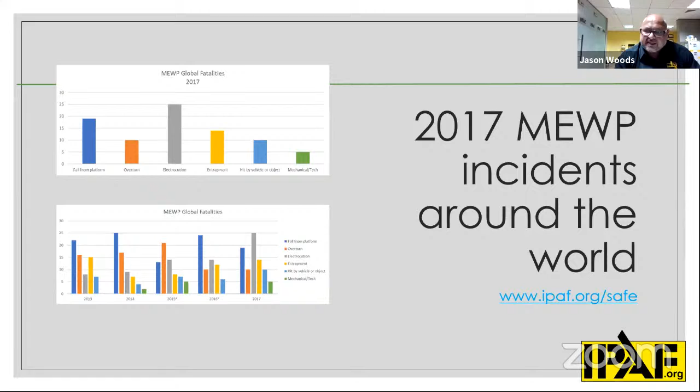So think of your projects where you're using this type of equipment, and mechanical or technical failure. In the Middle East, we generally see machines catch fire at the engine. That means the platform is elevated. Now these lifters reach, the boom types are over 180 feet now. You can get a scissor to take you over 100 feet. So if you've got an incident of mechanical failure at the ground and you're elevated, then you need to have a plan. And your plan needs to certainly bring the people down safely, meaning the workforce or the operators. So we've been following accident trends since 2010, and we continue to observe accident trends.

Because don't forget, I could highlight something quite quickly here - we call it emergency descent. So it means that if a platform is stuck in the elevated position, there are two systems which we're able to bring the platform down safely if the normal controls are not working. One is from the hydraulic system, which is great. But secondly is from the auxiliary system, which is the normal control panels - could be in the platform whilst you're elevated, or it could be at the ground position. But naturally, you're relying on the battery to give you that power source now.

So if you don't have an inspection process and you rely on an auxiliary system for an emergency lowering on the project, then, if it's not in good working order, you're just waiting for a real accident to really happen.

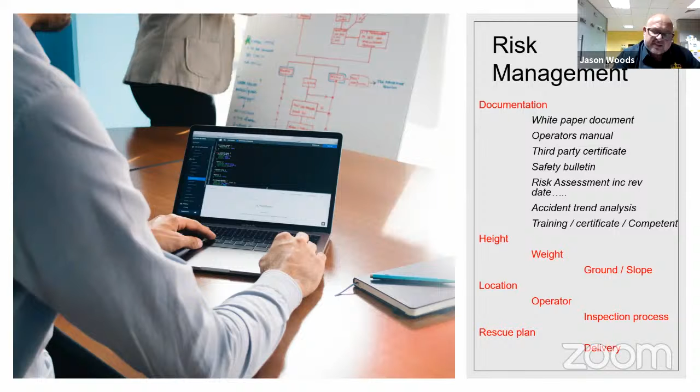Many sites have a delivery and collection zone. So when the machines come into the project, they're inspected as they've just been offloaded from the rental company. Like I say, the terminology for risk assessment, risk management, I think that it never goes away, and it continues to be a revision. Maybe you don't change things, maybe you don't have to change things. But I think as safety professionals, it's very important that we analyze and assess - is there a potential risk of something going wrong?

So when we focus on aerial work platforms, they have many different industry names. People call them man lifts, man lifters, boom lifts, cherry pickers, flying carpets. I've even seen workstations. But in the nuts and bolts of it, the machine is manufactured by the manufacturer to a standard. How we divide the machine is, it depends how the machine lifts away from the chassis. So if the platform stays inside the tipping lines of the chassis, then that means that it's a vertical lift. This one, for example, on the picture, which you can see, it's a boom lift. So naturally it's designed for the platform to come away from the chassis. So that then takes it into a B category, which falls as a boom type machine.

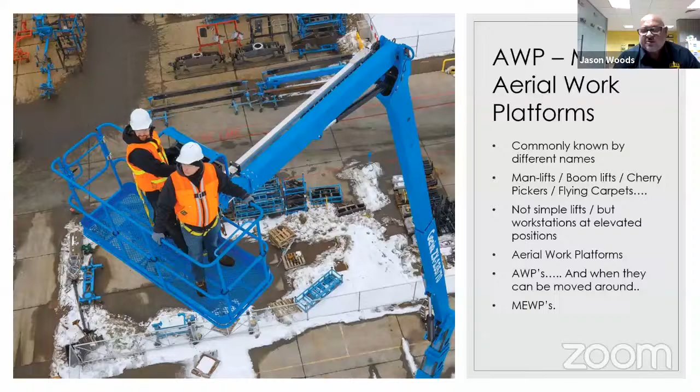But as you can see, in terms of our images, we have different types and different designs of lifters, but they are categorized like your driving license. If you're going to drive a motorcycle, you certainly wouldn't need to have a heavy goods license, because the motorcycle is a totally different drive.

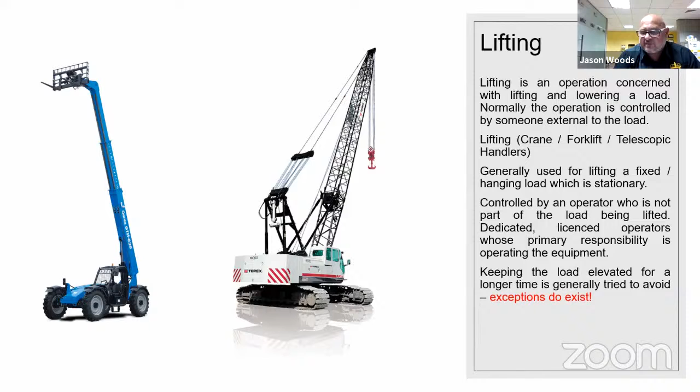There's always a big question in amongst the divide between lifting equipment. I think that where the divide always comes in is, if you imagine cranes are dedicated to lift materials, granted, but it's controlled by an operator who is not part of the load. That means that the guy or the operator could be in his platform, in his cab, for example. Whereas when we look at the elevating work platforms, it's slightly different, because the human body is actually inside the platform as he's maneuvering from A to B. And it depends what type of machine and category we have, and that then relates back to the license.

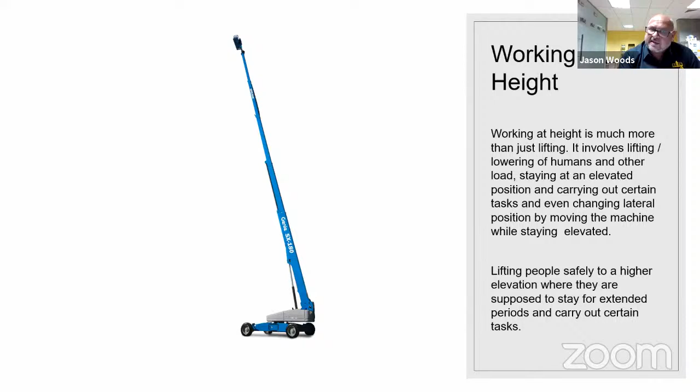But working at heights is certainly a serious issue, and I think it's very important that we do focus as safety professionals. They're never always small heights - sometimes they're great tall heights, let's call them. And it's never a straightforward lift, as you can see on the images. Sometimes we have confined space at height, which then takes a skilled operator and a manager to actually maneuver the platform into a safe zone.

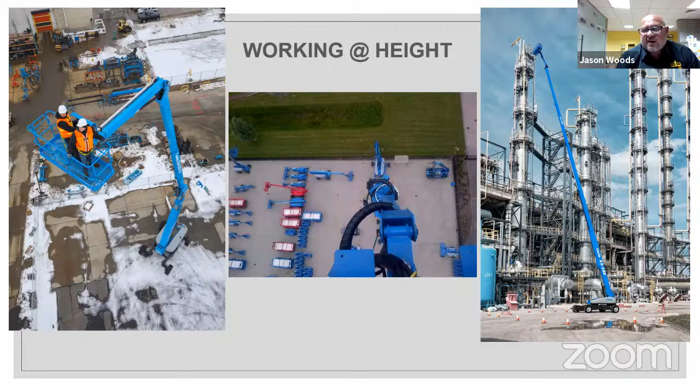I'll just briefly touch on this. There's a lot of information you can filter back and forth to the IPAF website. We have a category poster, so we have two things: one is category and one is type.

We would expect to see some limit switches involved at these heights, and it would be important that the limit switch is your safety device, so you're not going to drive a machine too tall. So a 3 category means the machine is mobile, and the B category means the lifting element comes away from the chassis.

I'm not going to delve too deep into that, but I'm sure most of you on this call will certainly use a 3A and a 3B machine. They're probably the most popular machines you'll see on the worksite. However, you will see some 1Bs floating around also, but the majority would be 3B, 3A, 1B.

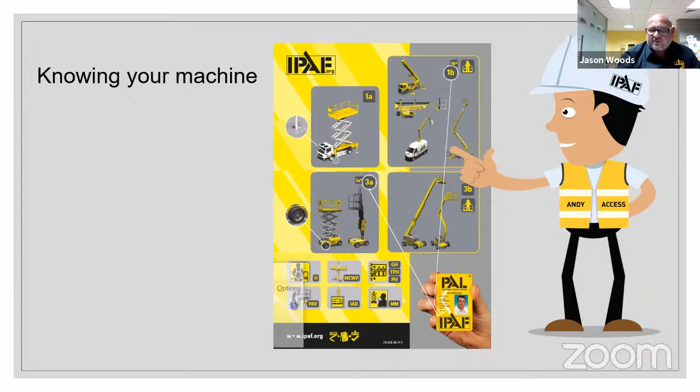Let's focus on specifications, because as a safety professional, when we're analysing what type of machines we should have on our project - I know rental companies can come and help you, but you should have knowledge also as a safety professional. So I'll give you an example here. We're using a Genie brand. GS stands for Genie Scissor.

The 1930 means we're 19 feet high and 30 inches wide of the platform, or the chassis. If we go to the GS5390, it would take us 53 feet high, with the chassis width sitting in at 90 inches.

The terminology RT is rough terrain, meaning you're driving over uneven ground, for example, whereas the GS19 would be a slab scissor, indicating towards solid ground. Some slab scissors will be an indoor machine only.

You'd expect to see some decals on the machine, or certainly the operator's or manufacturing data plate would give you that information. DC would be direct current, so that could be plugged in. Or you might find a hybrid, which would be bi-energy, generator to charge the batteries.

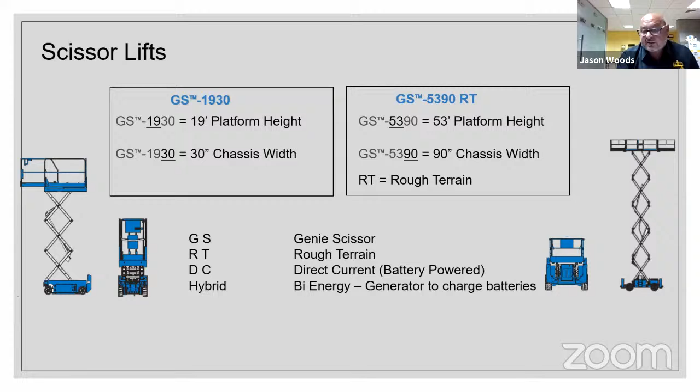When you look at the platforms, you can see on the right side we've got a double extension platform, whereas on the left we have a single extension platform. Sometimes they're manual, sometimes automatic, meaning they're operated through the controls - you'd have an additional toggle.

When we focus on booms, the telescopic boom means it's a straight boom - you'll see XC now appear on some of the machines, and what that means is it gives you extra capacity in terms of safe working load. But there's a catch to this: if you're going to put more in the platform, then naturally your heights are going to be reduced.

There will always be guidelines through your specification sheet in terms of if you're able to put extra capacity of weight into the platform, but certainly look at the working envelope - with extra capacity there would be reduced movement of the platform whilst elevated. Again, I can't emphasize this enough - when doing your site surveys, certainly get the rental companies involved. They are experts and have a lot of tools to help you with your risk assessment.

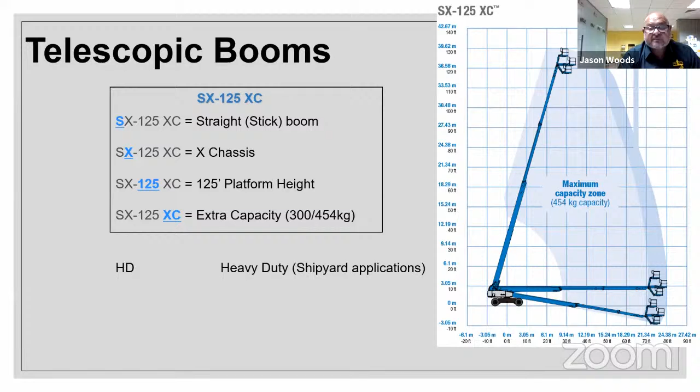We have two types of booms which we work with.

The first boom was a straight boom, whereas the articulating boom is dedicated and designed for up and over buildings or obstructions. It gives us extra features, which means extra controls inside the panel and at the ground.

The ground is important for pre-use inspections. So for example, we have a Z6037 FE on the screen. Z would indicate that it's an articulated boom, so that would be the lifting element. The 60 would indicate the platform height, the 37 is outreach, and then we've got FE for fuel electric.

But other abbreviations then: if you see N on the actual machine dimensions, that would indicate that the chassis is narrow. So perhaps you're working in a confined space but still need to reach 60 feet with 37 feet outreach. Then we would be talking to the rental provider, expecting the chassis to be narrow. The jib is a fantastic piece of equipment.

It's kind of another meter, or just over a meter, of lifting element. So if you're moving into a confined space, having a jib on your platform or lifting element can help position that platform nice and comfortable to carry out some work activity. You have J for jib, and RJ is different - RJ is rotating jib, meaning the jib would actually move. So you have a turntable on the platform, but also a rotating component on the jib.

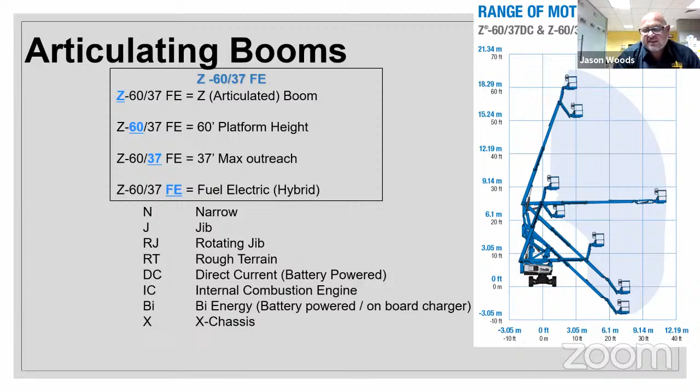So again, we're back to DC, RT, IC. We have BI, which is BI energy, focused on battery powered. And then we have X for the chassis style.

Now I'm going to take us back to the headaches which we have as safety professionals: soft ground, uneven ground, and slopes. Construction projects are never straightforward because we have areas of concern - machines get caught, they get stuck, and generally it's because the machine has become the wrong piece of equipment for that particular setup.

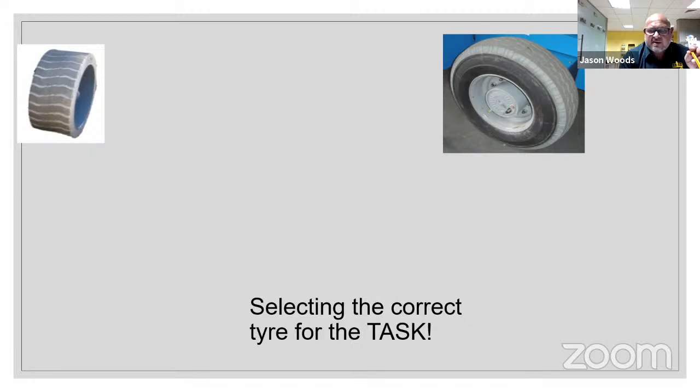So certainly focus on the ground conditions. I have some fantastic tools here which can help you, and what I like about it is it's free of cost - no charge, everything is accessible on the IPAF website. So the first step is to make sure we have the right wheels, or tires rather, for the project and for the use of the equipment.

This is very important. We have solid tires, foam-filled tires, and pneumatic tires - they all do different jobs. A pneumatic tire has a disadvantage of punctures, but a great advantage of giving better grip. If you think of a finished flooring, for example, a pneumatic tire is going to grip that floor far better than a solid or foam-filled tire.

But the disadvantage is we're encouraging punctures, and rental companies will give you a headache because they don't like coming out for punctures. So we must really focus on the type of tires we're going to use with our elevating work platforms - some are marking, some are non-marking.

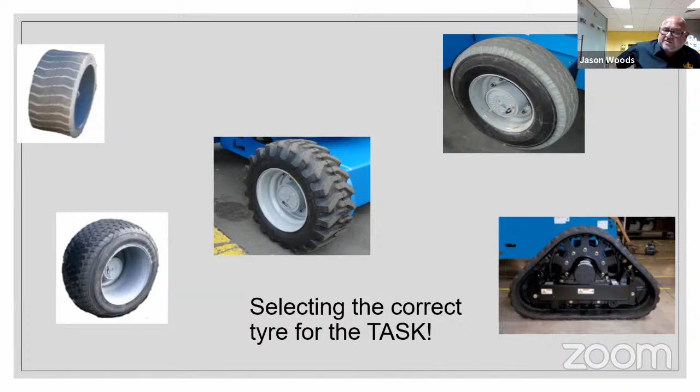The run of the mill, if it's indoors, we see a grey tyre on it, meaning it's a solid tyre and certainly non-marking. But there are other tyres available - we have turf tyres, rough terrain tyres. We then filter it through as pneumatic, foam-filled, and solid. The disadvantage of a solid tyre is it's going to be heavier, so now we've got to think about the actual weight and where the position on the platform is going to be.

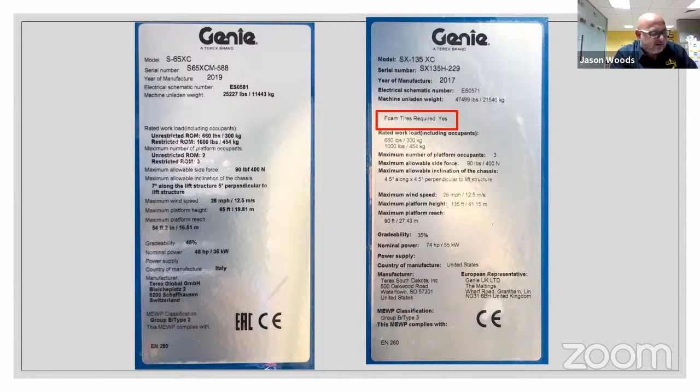The difference you can see now is the tires. With Genie brands, I think anything from 125 foot upward, you will not see a pneumatic tire fitted to these machines. Naturally it's the sheer weight of these elevating work platforms - imagine having a pneumatic tire on a very tall boom type machine, the risks and hazards if you had a puncture or lost pressure in one tire, and how much that would impact the person in the platform. So please focus on your data plates, because as you can see they can be different. Make sure this is part of your initial setup and risk assessment.

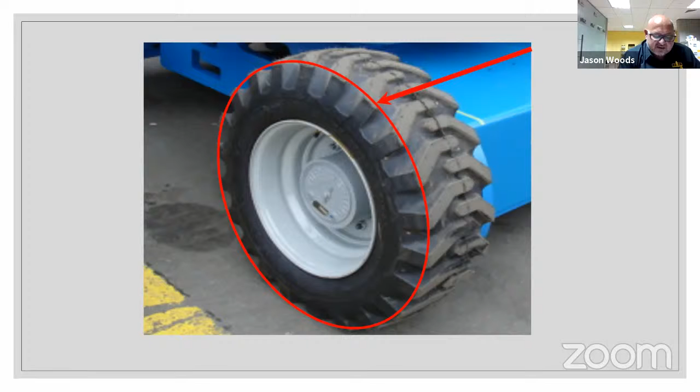Just a couple of key areas on tyres. A lot of questions come in about wear and tear of tyres. If it's a solid tyre, what's the dividing line - can we still use it, or not? There are a few ways to look at this. Certainly we have to think if it's affecting the drive and stability of the machine, then it needs to be questioned.

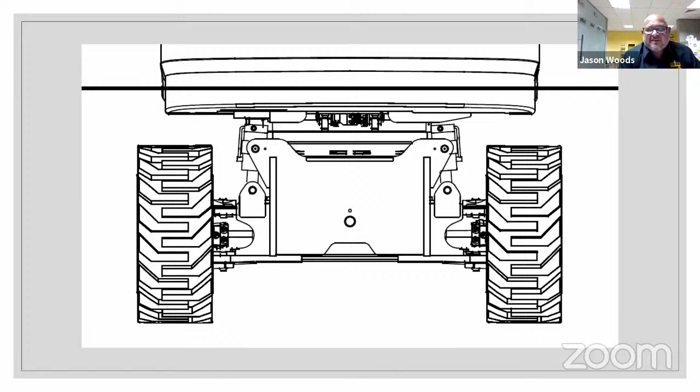Don't forget, when we look at the chassis and the measurements - the calculations from floor to platform height - it's like in scaffolding, where the narrowest base dimension affects the height of the structure. It's the same concept with elevating work platforms. We measure the width of the chassis from the wheels. The tire design also plays a role as ballast weight for that particular type of unit.

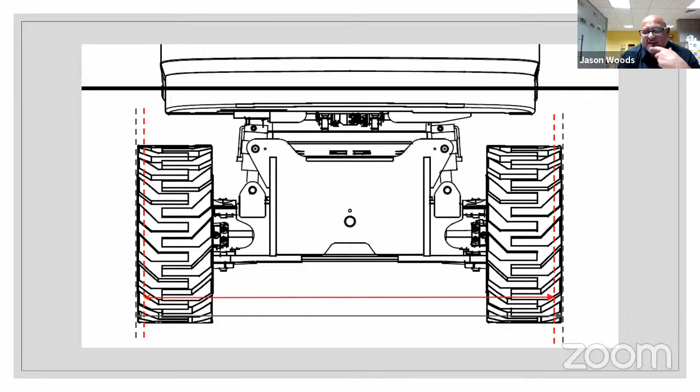But imagine if I was to shave 8 inches, 4 inches off a solid tire on your platform - you must ask yourself how much that affects your stability. A lot of this must be cleared through the rental perspective, but as safety professionals we should be alert and aware, because if we have a narrow base and we're still raising to substantial heights with platform movement, we now have a potential risk of tip over. When a machine tips over, everybody tends to blame overload, but sometimes it's not overload - sometimes there are a few areas of concern we need to address.

When we start looking at driving on slopes and uneven ground, I think what we've got to do is focus on the data plate, follow it through to the manufacturer's instruction manual, and indicate what position we're driving in. Are we driving into the slope? Is it a negative or a positive side? That would have an impact, because your gradients are changing and your platform positioning is changing.

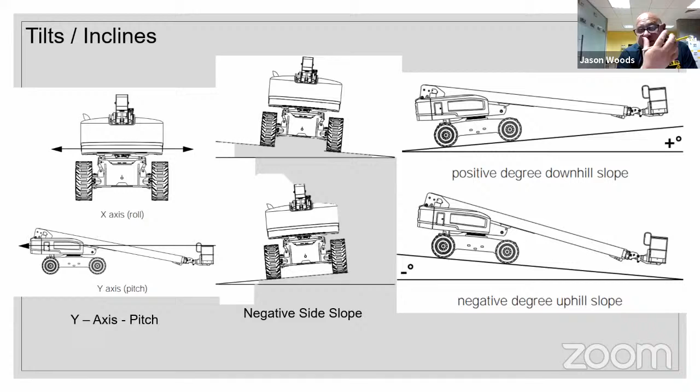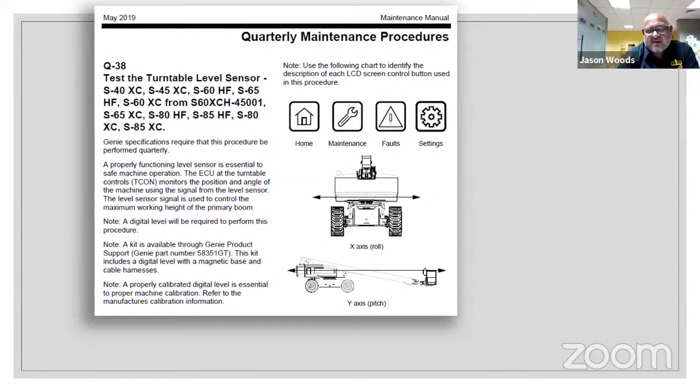If I push into maintenance, we'd be asking questions about the inspection procedure. For example, on a Q38, we must test the turntable level sensor - this is meant to be done at a set procedure. As you can see on the slide, Genie have indicated every quarter that this should be checked and tested.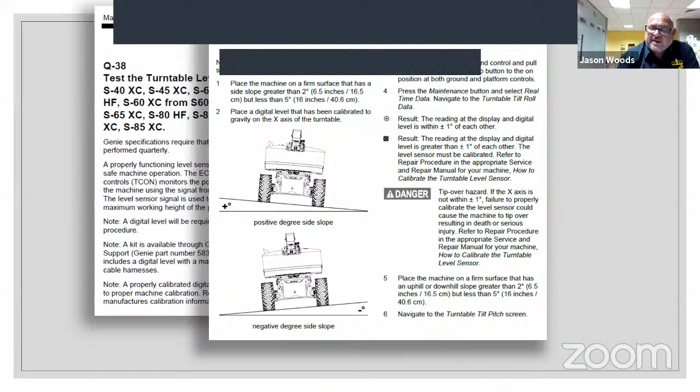Again, we focus back onto the slopes. There's a procedure - we have a tilt sensor fitted to the machine. The tilt sensor will be of two types: one will be a manual type.

So it's like a spring-loaded cone with a spirit level bubble on the top. The idea is that the moment that bubble moves, as you're driving over uneven ground, it's sending a message to the machine through the system. And the idea is that if we approach something too steep, we need to do something about it.

But you see, even on a pre-use inspection as an operator, even if you're just pushing the spring-loaded cone forward to check whether that alert is going to happen, you're not actually taking a reading of the tilt sensor. You're only checking that it's active and functionable. So then we have to take this back to the rental provider to make sure that they're actually carrying out their full inspections.

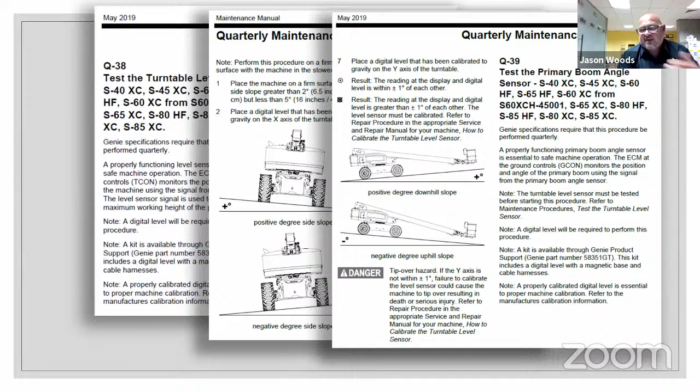The other type of tilt sensor is covered, so you cannot touch it, you cannot play around with it. The idea is when it becomes a digital tilt sensor, it means you physically have to drive this machine into the set slopes, and then it would trigger off to indicate that it's going to send that message back to the operator.

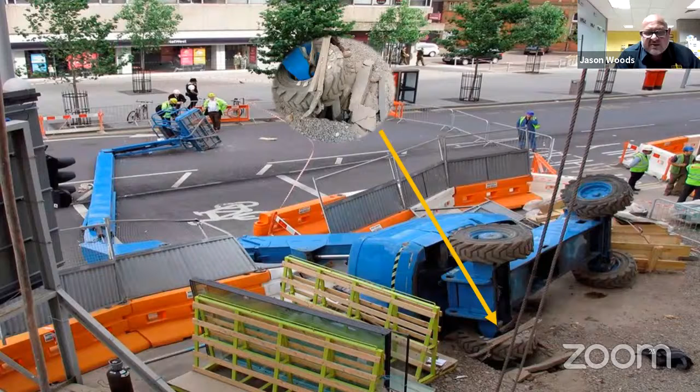So then we start our investigation - who's at fault, what could we have done to prevent this, and so on. I think we have a clear message when we teach operators, and the message is always: walk the route, think of housekeeping. I'm sure that's one of your biggest headaches, but certainly think of housekeeping. The operator of this machine should have done that, because when we look at the next slide, I know it's a construction project, but there was a manhole there and we should have avoided it. The weight of that machine is far too heavy for that manhole. So which then indicates that the machine just drove straight over it, and naturally it took a turn for the worst. Like I say, planning is so important.

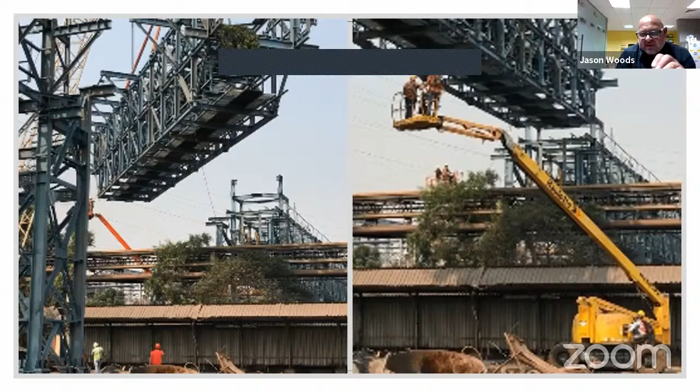On the IPAF operator training module, we do emphasize that the operator has responsibilities also. That's why they come for training. Again, when you look closely at this image on the right-hand side, you can see that the operator is at the ground, sat on the wheel, and there's two workmen in the platform. A big no-no - you must never use the ground controls to operate the machine. The ground controls are there for emergency descent and function tests, that's it, not for operating procedure.

So I'm going to quickly take you through a few slides. It certainly won't take us too long, but there's some great tools here for you as safety professionals. The website is ipaf.org - go straight into tools and resources, because I'm going to help you understand the spreader pads if we're using outriggers on soft ground, and how to read it. So we just click on the website, on the portal, tools and resources is what we're after, and then we're searching for spreader pad calculator. You can do it on your phone, laptop, tablet, or PC. Once we flag up spreader pad calculator, it'll ask you a few questions - about 10 clicks and then you have the answer.

So before we begin, we need to have direction. We need to understand what's the ground pressure, what pressure is coming from the outrigger, and once it meets the ground, we need to make sure that it's going to be stable.

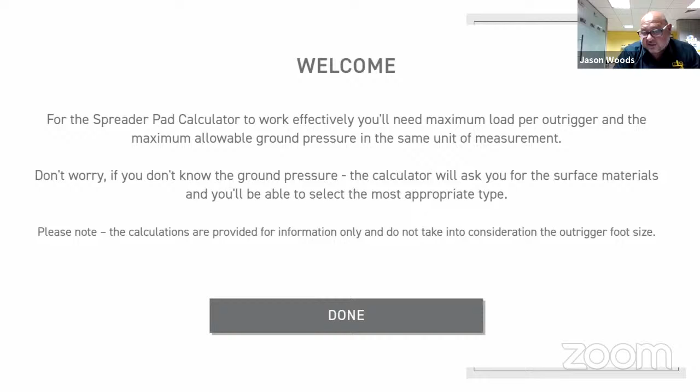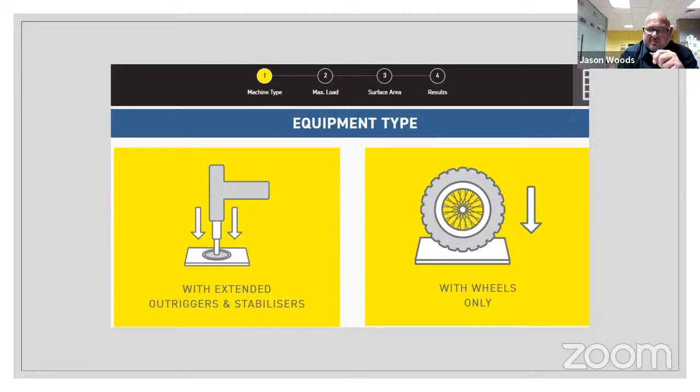That's where you will find it on the outrigger foot or the leg. It will also ask you about the actual ground - is it solid ground, gravel, or sand? If you're still not sure, it gives us images, which is far better for me. Once I click on the image and click forward, it gives me a dimension of what size my spreader pad must be. They don't actually tell us where to get it, but it does give us good indicators for working in soft ground conditions.

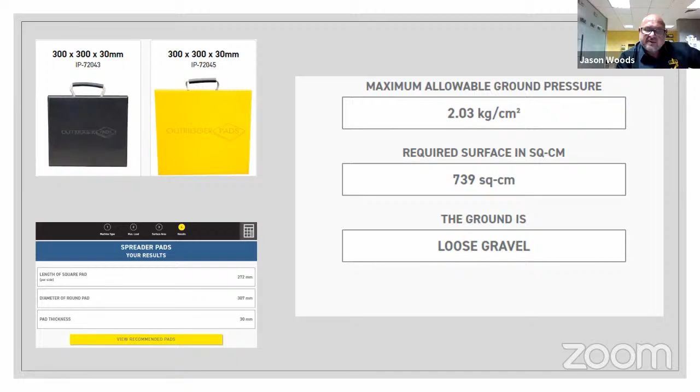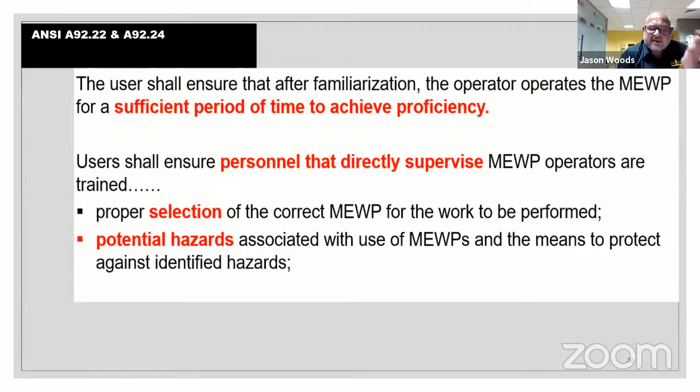When we flip back to the divide of familiarization and training - training has always been out there and familiarization has always been out there. Familiarization is not training, it's familiarizing yourself with the controls. Training is when we test somebody and make sure they're competent to actually operate the machine. That is written right across the board, whether it's an ANSI standard or a European standard.

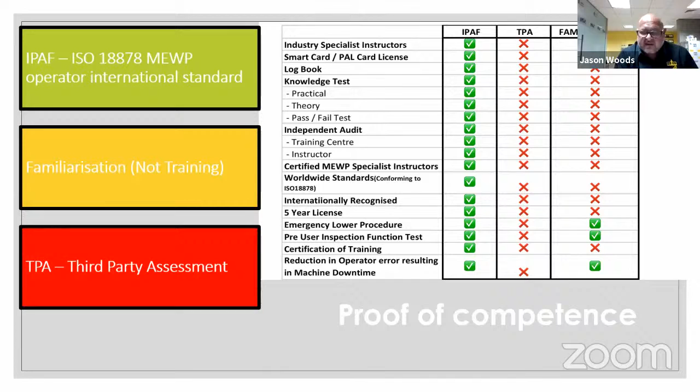Just a few divides of different types of training. Familiarization, as you can see, is quite straightforward - it's not training, though we do cross over on a few things. With familiarization we would expect to know the emergency descent and understand how to do a function test, which should reduce operator error. TPA is third-party assessment - as you can see, that really doesn't help the operator or the management team.

I'm really pleased - I've done a lot of work with different languages and translations. We're on around 28 different languages worldwide, but for our regions, the courses are available in Hindi, Punjabi, English, and Arabic is coming - we just signed Arabic off, and Bengali will be available also. So what we're trying to do is listen to the contractor and follow the contractor's demands, because it's important that the messages are sent out to the workforce.

This is an interesting slide, guys. The training which IPAF deliver is under ISO 18878. Look at the content - only 10% is MEWP operational. The rest is about the MEWP categories, understanding the lifting elements, focusing on risk management. We would talk about in-country regulations, requirements, structural parts, safe operating methods, and the sequence of lift. So it's very important that we get this divide right.

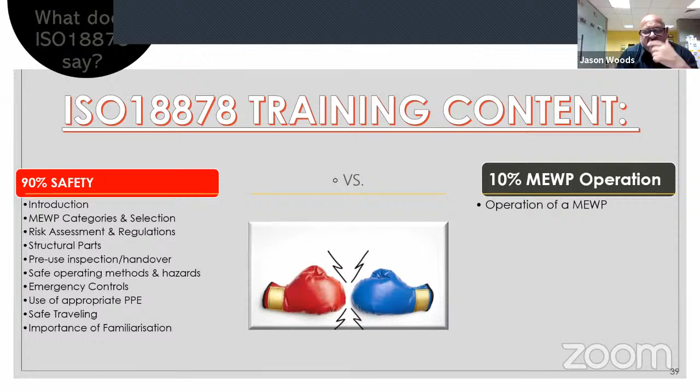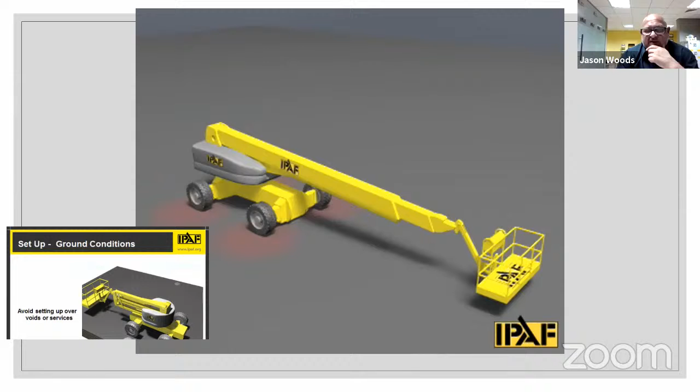Naturally we would test the operator because he needs to be competent, but there's a lot of support there for the operator. When we go back into different languages, this is becoming perfect for us now, and we're kind of filtering between the divide of a theory session in the classroom and the practical.

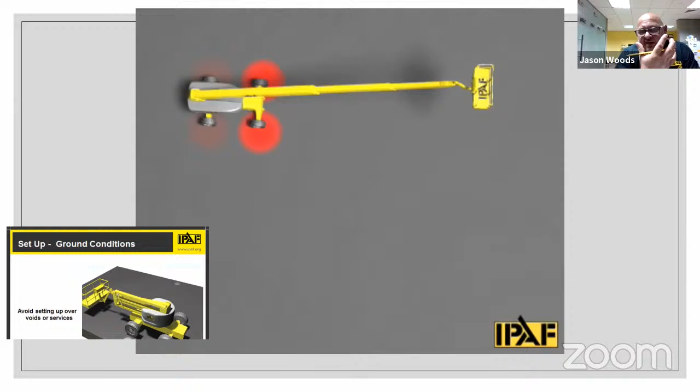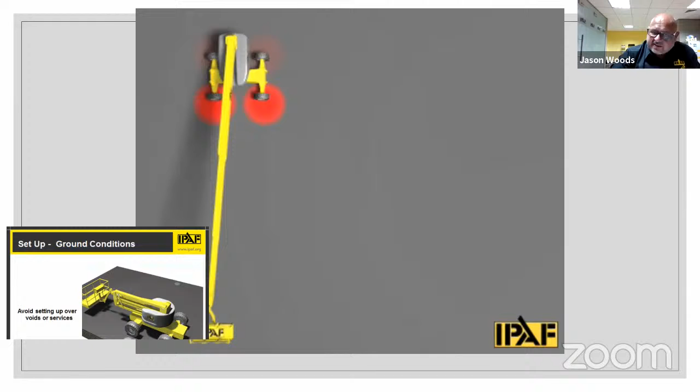Interesting short video here, guys. Look at the red where the platform is moving, indicating where the pressure points are of carrying or bearing the weight of the machine. I mentioned earlier some of you guys would use a 180-foot boom lift, probably weighing between 22 and 25 ton. These red indicators are carrying up to 80% of that chassis weight. So think about your ground, how it's affected, and make sure you plan it through your risk management.

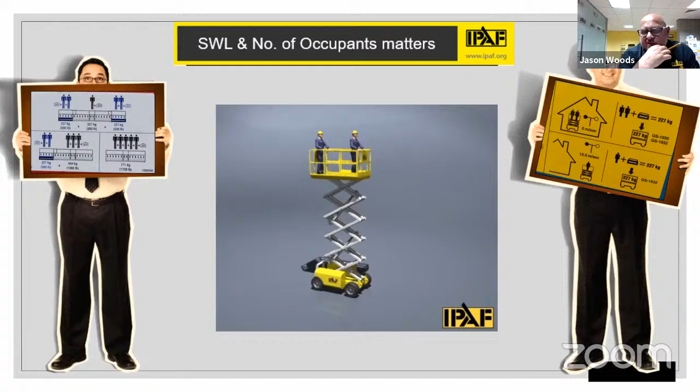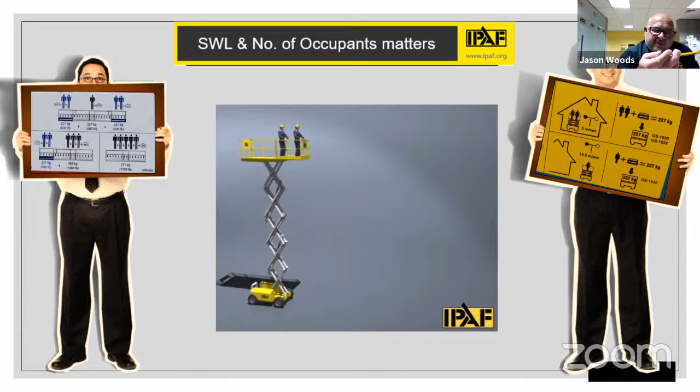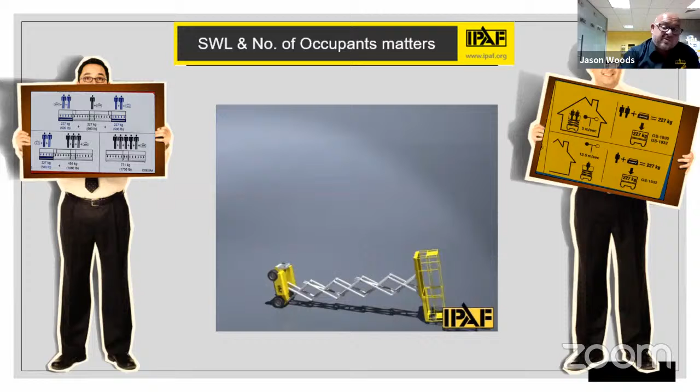Interesting slide also, short video, safe working load. Some machines will be designed for indoors, some for outdoors. Yes, there are decals indicating this, and if you look at the data plates on the machine, it will also tell us if it's an indoor or outdoor machine. Again, we're back to the standard of equipment. So familiarization is all about functions and features - it would be visual, but also function checks for emergency controls, safety devices, and anything specific for that particular brand and model number of the machine.

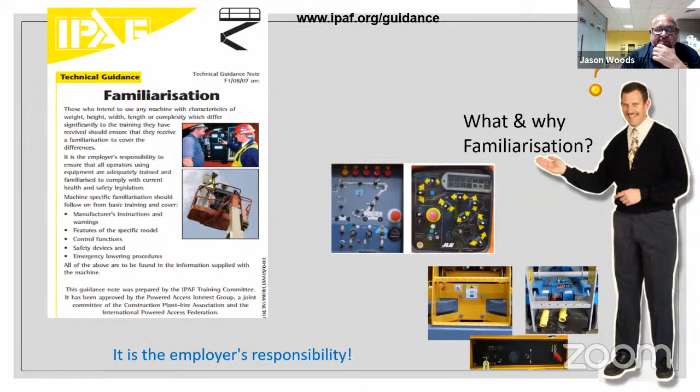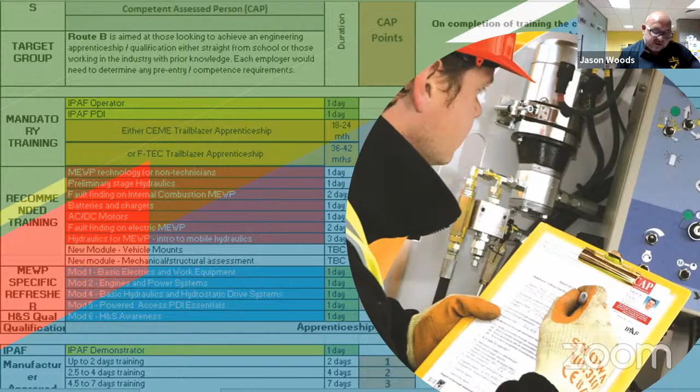In terms of inspections, this goes on forever. We're actually running workshops the last Tuesday of every month for third-party inspection companies at the moment. We have an audience of around 610 registered engineers - they don't all come to the workshops, it's optional, it's free. They don't have to join us, but we try and help them in their pathway when they're inspecting this type of machine, asking questions to the owners to make sure the actual elevated work platform is fit for purpose. So when it arrives at your project, we know the history of these things.

There are also standards for rental companies. We've had IPAF Rental Plus for a long time. If you think of ISO standards for management systems, we have IPAF Rental Plus, and we encourage rental companies to join this, or at least have their own system, because this means they have a good management system of maintaining and renting the machines out to the user. We are very passionate about Rental Plus because it certainly adds value to your projects.

Maybe this is something the project should be looking at: who's renting the machines to our sites, and what's the standard of equipment coming to the site. What you don't want is to say you're going to rely on an emergency descent system, but when you go to use it, you find it doesn't work. So it's very interesting in terms of making sure we're having the right equipment delivered from the supplier.

Okay, so that takes me to the end of my presentation, guys. I'm hoping we don't have too many questions. So I will just stop sharing for a minute.

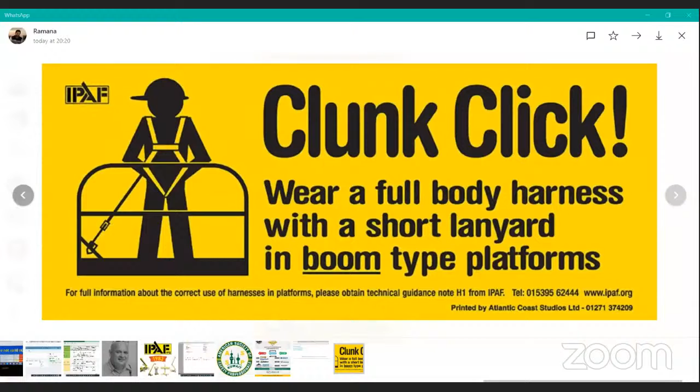Okay, thanks for the reply. Thank you, Ramana. Thanks. Yeah.

Thank you, Jason, for answering this question raised by the participants. There are too many congratulatory messages saying the session was very well received and people liked your excellent presentation. Thank you, it's a pleasure, as I mentioned before. You have already won the hearts of the HSE professionals, and we need you guys, we need you guys. Correct, yes, thank you Mr. Jason for making it very interesting.